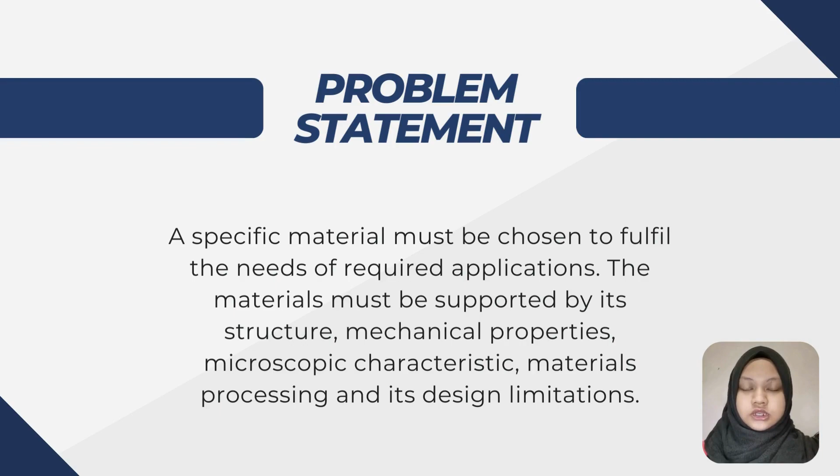Regarding our topic, the material for aerospace application, we decided to choose silicon carbide as the material. As an introduction, silicon carbide is composed of silicon and carbon. Another name for this material is carborundum. It is a popular option for a variety of applications due to its combination of qualities such as high hardness, high strength, and high thermal conductivity. In aerospace, silicon carbide is applied for high temperature components like heat exchangers, rocket nozzles, and gas turbine engines.

Silicon carbide has a high melting point and heat conductivity. Besides, it's also suitable to reduce the weight of airplanes due to its lightweight features. In addition, silicon carbide coatings are used to prevent corrosion and wear on metal components. These coatings provide excellent resistance to severe chemicals and high temperature conditions.

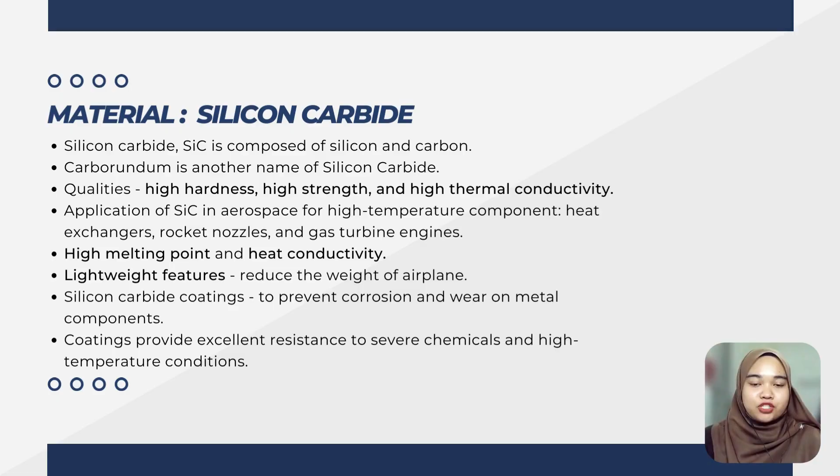Next is the detail on the type of silicon carbide. Silicon carbide is a compound made up of silicon and carbon atoms, and it has a crystalline structure similar to that of diamond. Silicon carbide has several characteristics that make it a promising material for aerospace application. Firstly, silicon carbide can withstand very high temperatures without losing its structural integrity or electrical properties. This makes it suitable for use in the high temperature environments found in aerospace applications such as engines or

exhaust systems. Secondly, silicon carbide has a very high thermal conductivity which allows it to dissipate heat more efficiently than other materials. This is particularly important in high temperature aerospace applications where heat management is critical. Next, silicon carbide has high strength and stiffness which make it suitable for use in structural components and as a reinforcement material in composite structures. It also has a low density, making it a lightweight material that can help reduce the weight of aerospace components

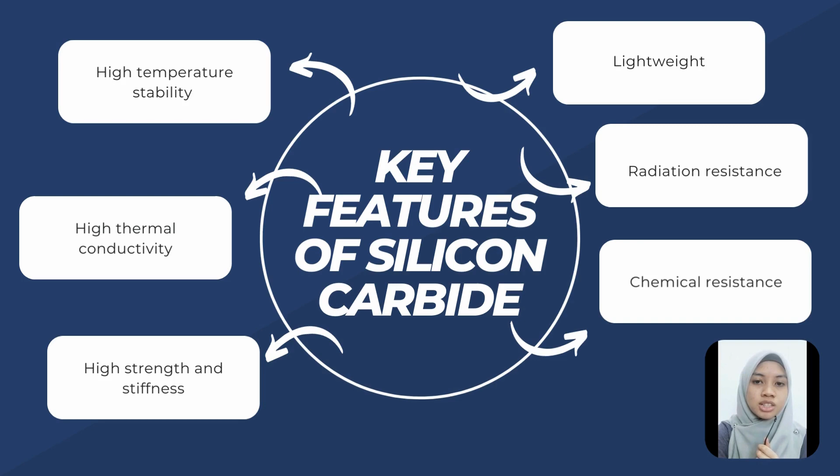Details on the physical properties of the material. Silicon carbide displays a variety of unique physical characteristics. It doesn't have any odor and it has an appearance of black-gray to green powder and gray in solid. This material has a density of 3.2 gram per milliliter, a hardness of 9.5 Mohs, and a Knoop range of 2,670 to 2,815 kg per millimeter. With this hardness and Knoop range, this material is harder than corundum, which is the crystalline form of aluminium oxide, making it the hardest abrasive material after diamond, cubic boron nitride, and boron carbide.

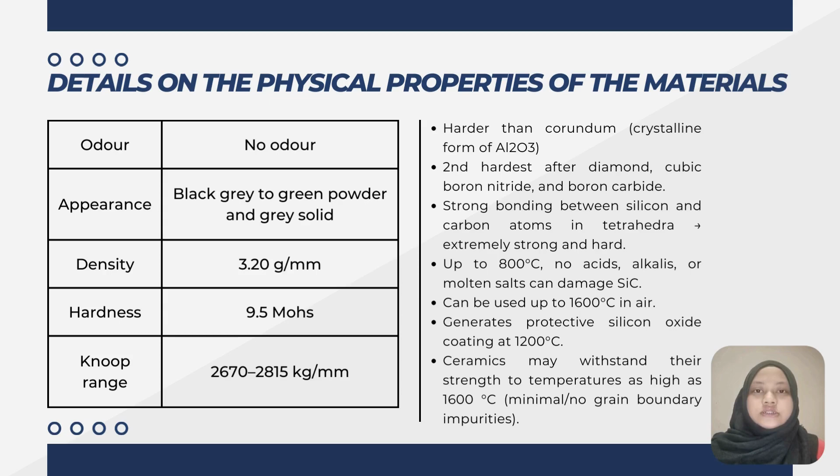The ceramic is a high-quality refractory material due to its strong thermal conductivity, excellent thermal shock resistance, minimal thermal expansion parameters, as well as high resistance towards corrosion and oxidation. The strong bonding between the silicon and carbon atoms in tetrahedra that make up silicon carbide's crystal structure results in a material that is extremely strong and hard. Up to 800 degrees Celsius, no acids, alkalis, or molten salts can damage this material. Silicon carbide can be used up to 1600 degrees Celsius in air and generates a protective silicon oxide coating at 1200 degrees Celsius. Ceramics made of silicon carbide with minimal to no grain boundary impurities may maintain their strength to temperatures as high as 1600 degrees Celsius.

Next, for the mechanical properties of the material. Silicon carbide has a density of 3.1 grams per cubic centimeter, a flexural strength of 550 megapascal, a Poisson ratio of 0.14, and an elastic modulus of 410 gigapascal. These are just a few of the mechanical properties which describe silicon carbide as a material. So silicon carbide has a relatively high hardness of 9.5 on the Mohs scale of hardness. This is even harder than aluminum oxide.

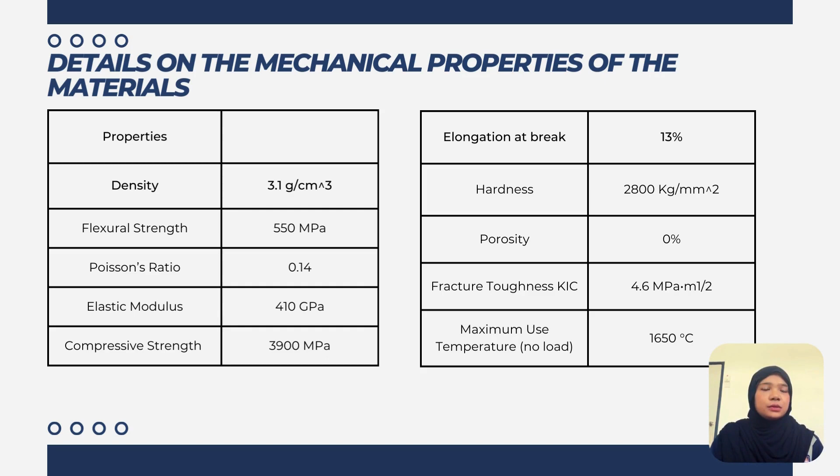This is due to its covalent bonding and strong silicon-carbon bonds in the crystal lattice. This is what contributes to its high strength. Although it is tougher than most ceramics, it is still brittle and prone to breaking under stress. This corresponds to the fact that silicon carbide has a high elastic modulus, which makes it resistant to deformation and stiff.

In terms of structure, silicon carbide atoms are connected together tetrahedrally, with each silicon atom bonding with 4 carbon atoms, strongly holding them in place. Nonetheless, impurities may slip into the lattice system and disrupt characteristics. Polycrystalline silicon carbide ceramics have fine-grained structures that can range from micrometers to millimeters.

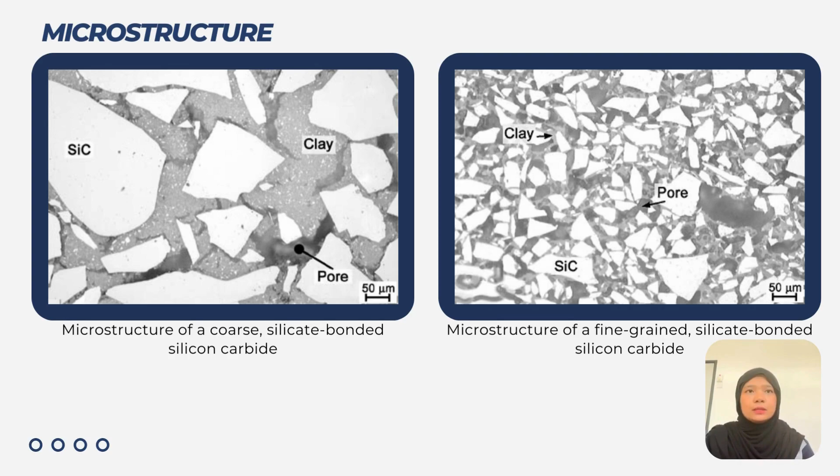Next, I will present the fabrication methods of silicon carbide. There are several methods, but I will talk on 5 methods. The first one is chemical vapor deposition (CVD). It's a process by which vapor phase chemicals are condensed to produce solid phase material. The gas combination of silicon and carbon reacts at high temperature, which makes the silicon carbide deposit as a substance. Methyl trichlorosilane is used as a gaseous particle and hydrogen as a carrier gas, then ejected in the reaction chamber.

The second method is liquid phase sintering (LPS). It's a method of consolidating powder compacts with many ingredients at a temperature above their solidus and consequently with liquid present. Silicon carbide powder is sintered alongside a liquid phase, usually carbon or boron. The liquid diffuses into the silicon carbide particles and sintering occurs by being heated to a temperature below the melting point. Grain development and densification occur through the liquid phase, creating a high density silicon carbide material with superior mechanical qualities.

So the third one is hot press sintering, with the application of uniaxial pressure through a simple die shape. The material is placed in the mold at 20 to 50 megapascal pressure and heated to 1600 to 2000 degrees Celsius, resulting in formed material.

The fourth is reaction bonded silicon carbide. It's comprised of silicon carbide powder and a carbon source, for example graphite or carbon black, infused with molten silicon at high temperature. This results in a dense and highly durable material compared to the other methods.

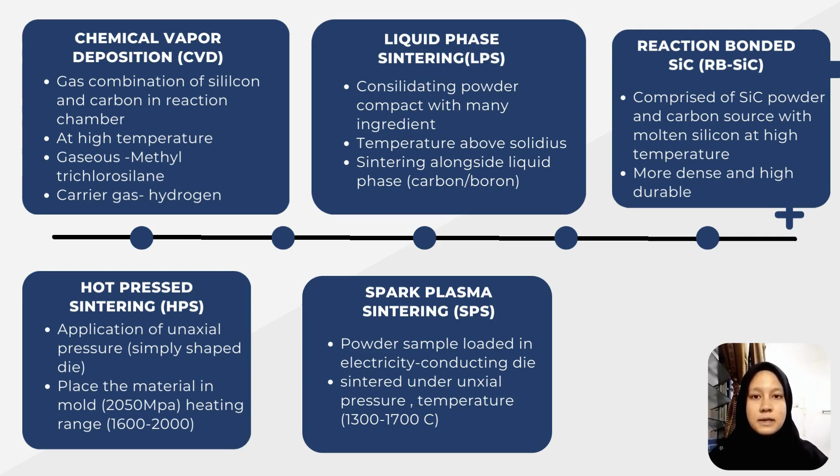So the application of the material in aerospace systems. It is used in aircraft engine turbine blades, shrouds and combustion liners because it withstands high temperature, so it is ideal to use in an aircraft engine. Next, because of the light weight of the CMC material, it can be used in lightweight components such as aircraft wings and fuselage. Besides that, it can also be used in thermal management in aerospace, such as manufacture of heat sinks and heat spreaders, and help to keep electronic systems cool.

So the last one is coating. It's a good material to use as coating on critical components such as turbine blades exposed to erosion and oxidation. It has more longevity and resilience to wear and tear than conventional coatings.

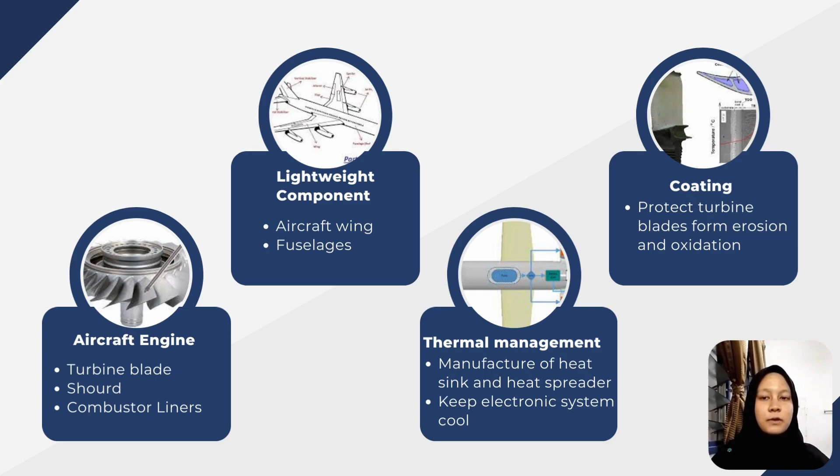In conclusion, silicon carbide is a structural ceramic material which has the properties of excellent oxidation resistance, strength retention at high temperatures, high wear resistance, high thermal conductivity, and good thermal shock resistance. Hence, silicon carbide is a flexible material which can raise the effectiveness and performance of a variety of aeronautical systems. Due to its characteristics, silicon carbide is perfect for high-stress applications while also being suitable for electronic and monitoring systems.